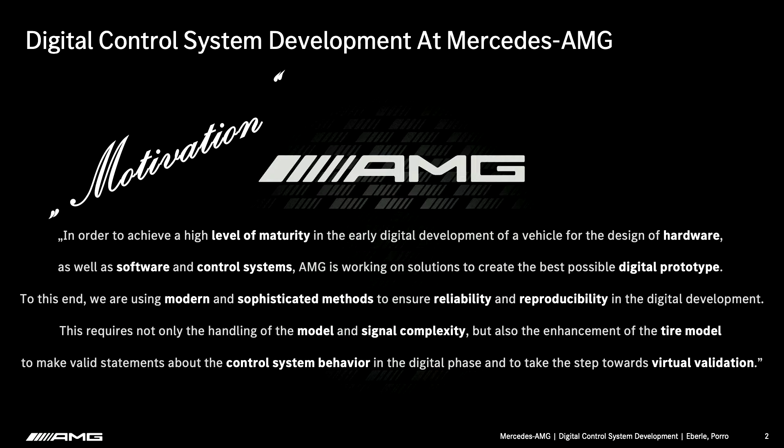This method also enables us to implement the new AMG tire model. Our goal is clear. We want to make the step into the virtual validation of control systems in vehicle dynamics. So, let's start and let's go.

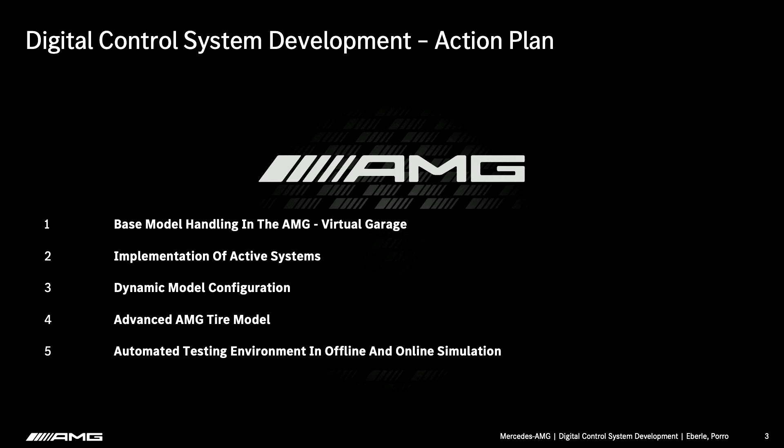So, this is our action plan for today. With the first 3 points, the AMG Virtual Garage, the implementation of the active systems, and the dynamic model configuration, I want to take you on a journey of methods and handling of our vehicle models. On the fourth point, Alessandro will talk about the advanced AMG tire model. And on the last point, I will summarize it all together in an automated testing environment, of course, for offline and online simulation. No wasting time, let's go.

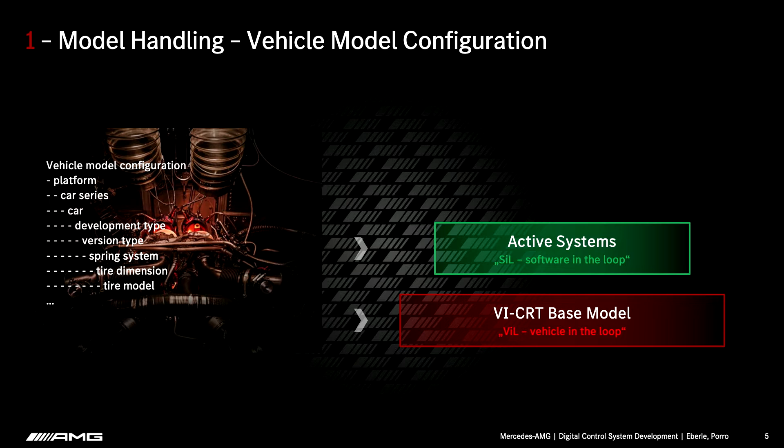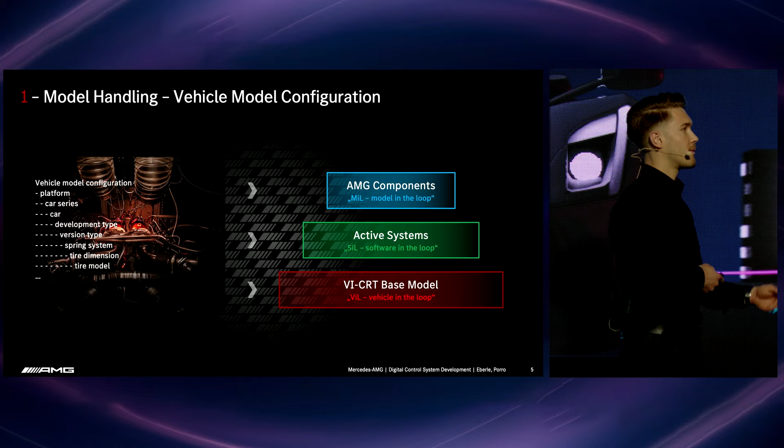Before I start with the AMG Virtual Garage, I want to explain how we define or describe our vehicle models. So we have here a vehicle model configuration, and we can split up this vehicle model configuration in mainly 3 parts. First of all, we always have a VI-CRT base model, our baseline for all of it. In the second part, we implement our active systems, and one of the most important parts, our AMG components. But now, first of all, we are dealing with the VI-CRT base model.

We have to say that this method was created due to the growth of the organization and the increasing number of models and cars we have in our organization. So once an MBS engineer exports a model from Adams to VI-CarRealTime, he or she usually has the model locally. But to increase the accessibility and exchangeability of our models, we said, okay, why not have a virtual garage where we can put all our models in. And this is called the AMG Virtual Garage.

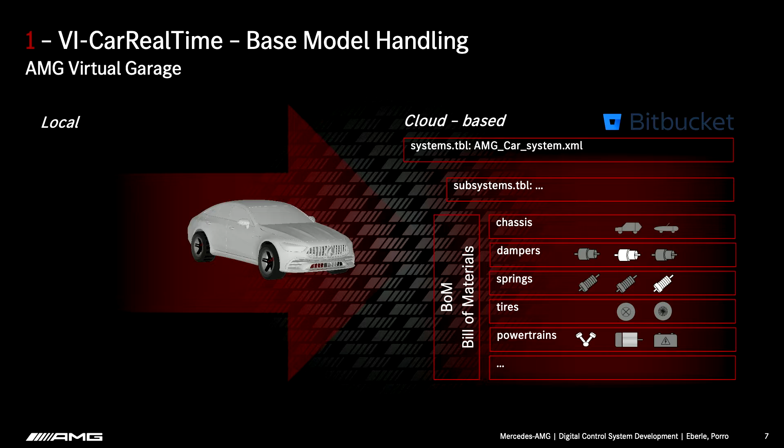So it is cloud-based here in Bitbucket, and when we take our car model, our system file, our subsystem files, and our third level files, we usually split it up into our BOM, our bill of materials. And we put these files into our goods cupboard, like you can see, for example, the tires and the chassis. And when we pull a car out of our virtual garage, we only have to take the system file, and all the subsystem files and the third level files which are linked to our system file come with us.

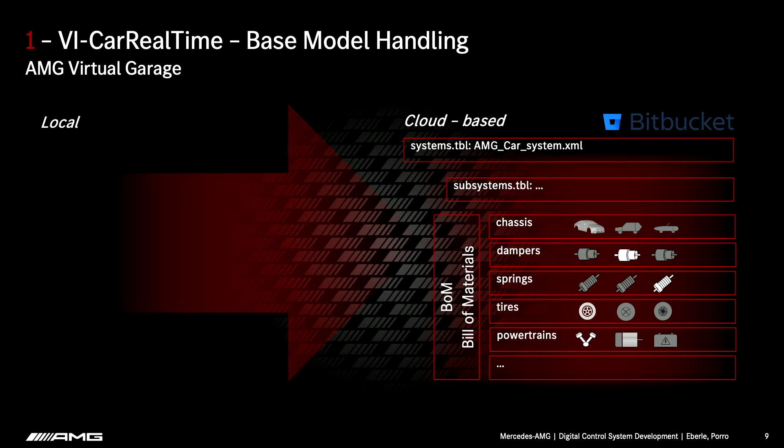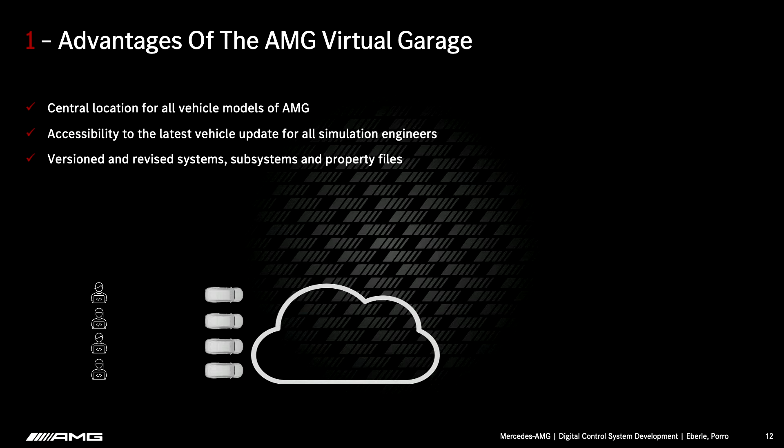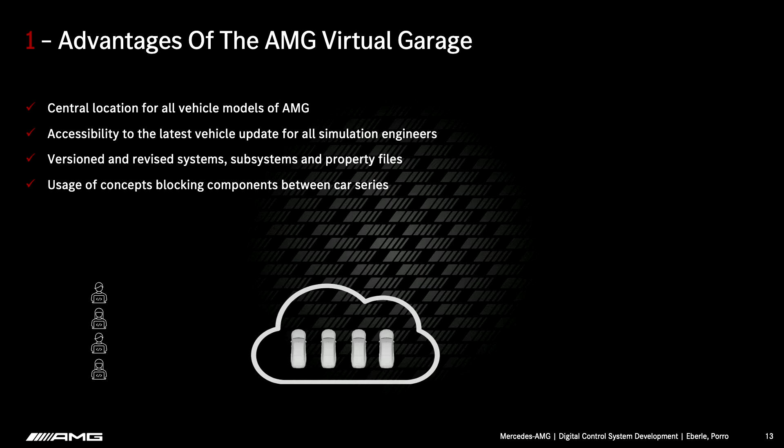So to summarize the advantages, we now have a central location for all our models. We have accessibility for all our vehicle dynamics engineers. We can document our models well, with versioned revision of systems, subsystems, and third level files. And of course, we can use the concept of blocking, because when two cars use the same spring file, for example, I only have to update the spring file once, and when I pull a car out of my garage, it always gets the latest update. And we implemented the possibility to export our models in an open or an obfuscated mode for internal or external usage.

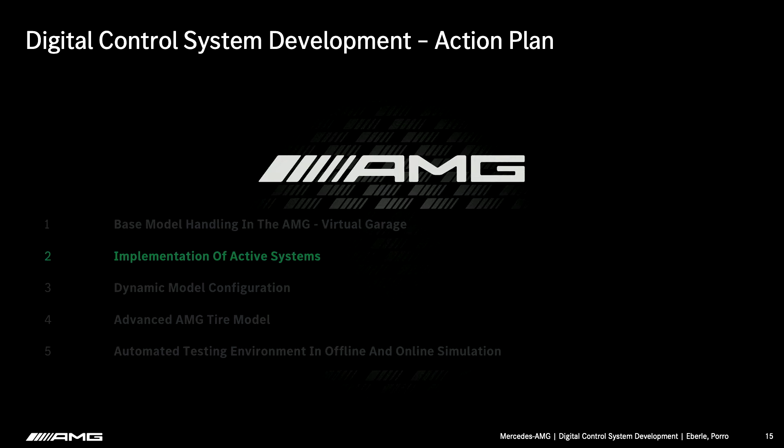So, the next step to level up our digital models is the implementation of our active systems. When I talk about active systems, I usually don't talk about the Simulink models we have. I talk about models like TargetLink models, AMESim models, C-code, or fixed datasets I want directly linked to my VI-CRT model.

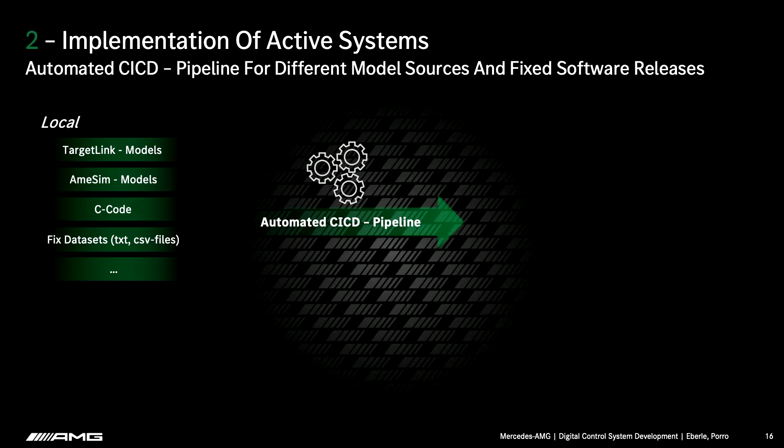When I have an update in the structure of these models or in the parameter set, I do not want to have to link the models manually. I have an automated CI/CD pipeline, and this automated CI/CD pipeline allows us to build up FMUs. And of course, they are cloud-based too, here in the Artifactory and with the node for Linux and for Windows. So I want to use my FMUs on the Windows platform and on the Linux platform, and it should be the same.

And of course, we have here a logical structure to put it into our Artifactory. To summarize, this is triggered in an automated way, so I do not have to do one click; everything is automated. I can supply fixed software releases, and I can receive fixed software releases and put them in my folder structure. I can build up platform-independent FMUs, for usage in Sim Workbench online or in VI-CarRealTime offline. And of course, I make use of the easy connection of VI-CarRealTime by the FMU master and of Sim Workbench by patching it into the real-time database.

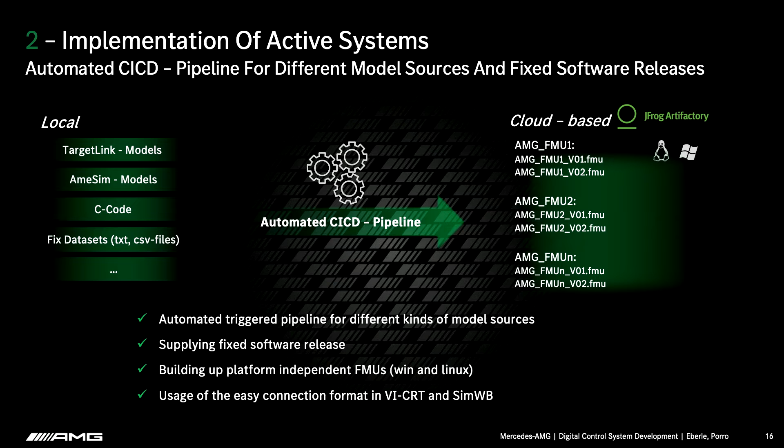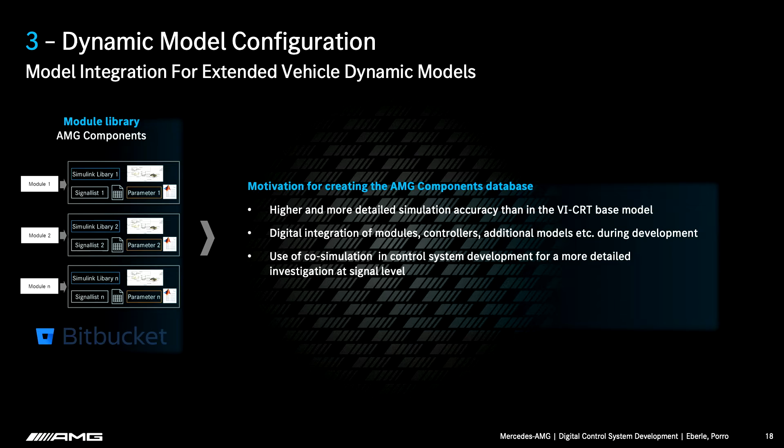Now, the third one, the dynamic model configuration. Before I go into the method, I want to explain the motivation behind it. By using the dynamic model configuration, I use the benefit of the co-simulation in MATLAB Simulink together with VI-CarRealTime, or the compiled version then in Sim Workbench. So with my AMG components, a database we build up in Bitbucket, well documented too, I can reach a higher and more detailed simulation accuracy in all of my models. I can directly integrate controllers, modules, principal controllers, and so on. This is one main part where I can implement my control systems, and I can do my developments on signal level. That's a big point here.

So these models in our database are Simulink models. Once I get a Simulink model, I add it into a Simulink library, and I build up the signal list. In the signal list, the inputs and outputs are fixed, and of course, information about signal type, signal dimension, and signal units, because later I need some calculations when I put all the modules together. And of course, at least one parameter set. And this is our dynamic model configuration.

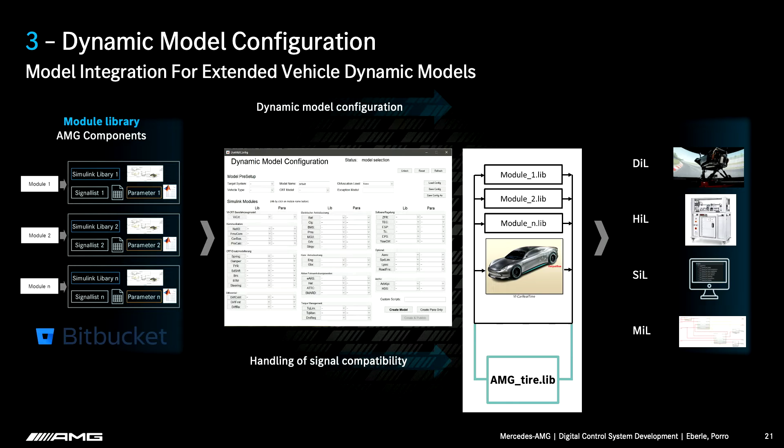I can select a target, so I can select the online or the offline version. Online is the simulator, offline my VI-CRT co-simulation. I can select the VI-CRT base model, and of course I can make use of all my libraries and the databases I have in my Bitbucket and build up a compilable Simulink model. I can use it offline and make some investigations in MIL or SIL, or I can use it in the online version and go to HIL or the driving simulator with it. And the dynamic model configuration was also the beginning of the AMG tire model. Now I will give the stage to my colleague Alessandro, and he will take you on a journey through the AMG tire model. Thank you very much, Maximilian.

So, let's talk about the tire model, how we implemented it into the dynamic model configuration, and what we did during the development. But first, we have to define a starting line. We have to define the requirements, what we need from a tire model in order to do control system development. The model should be real-time capable, so we want to use the tire model on the driving simulator. We also want to be able to start from zero velocity, so the model should be able to handle standstill conditions.

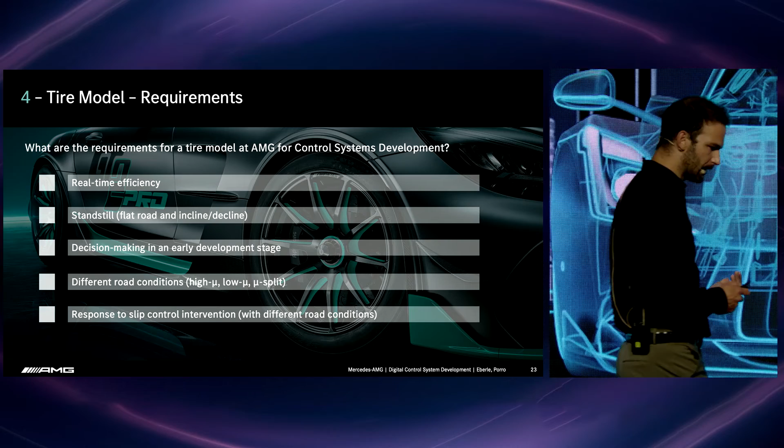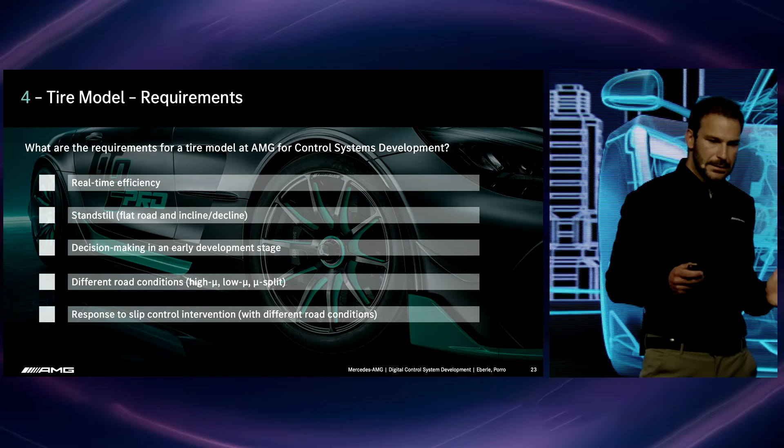We also want to be able to make decisions in an early development stage. But what does it mean? Not only that the results of the model should be trustworthy and realistic, but also that we should be able to get the parameters for such a model in an early development stage and not wait too long until we have a real prototype of the tire. Furthermore, the model should be able to handle different road conditions, so different friction coefficients, mu split, mu jump, and so on. And last, the dynamic response of such a tire model should be realistic and should have a proper response to slip control intervention.

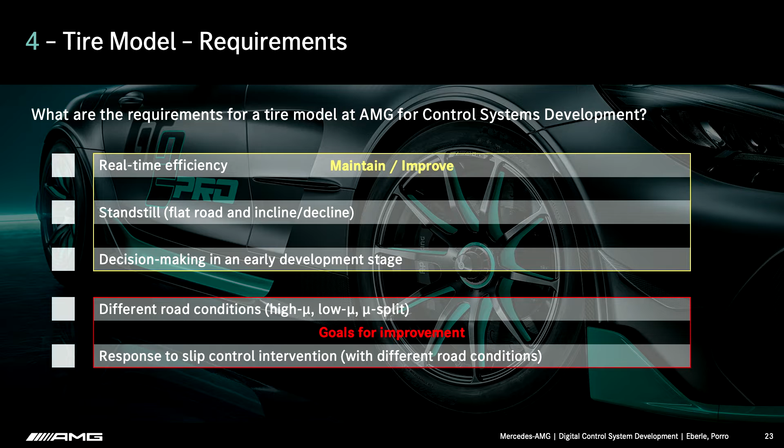So the first 3 points are our boundary conditions and also the reason why we decided to start with a magic formula-based model. The last 2 points are what I'm going to show you today and the goals for improvement. So first, we can take a quick trip to Sweden and go with different road conditions.

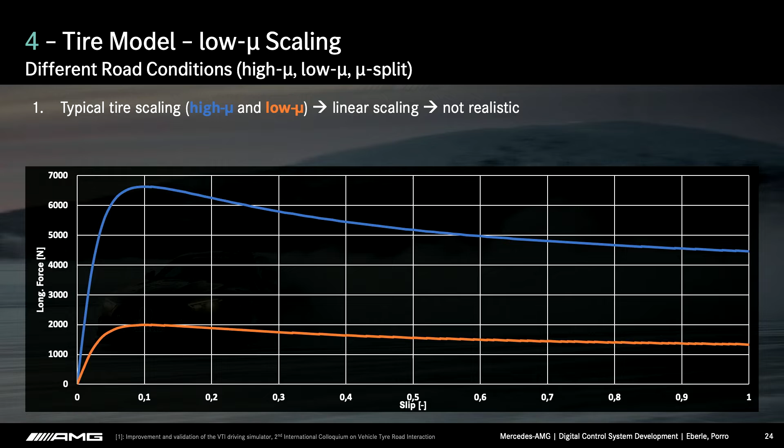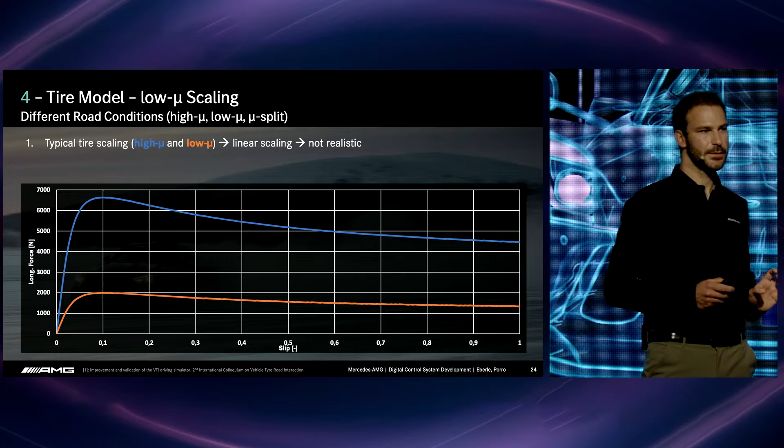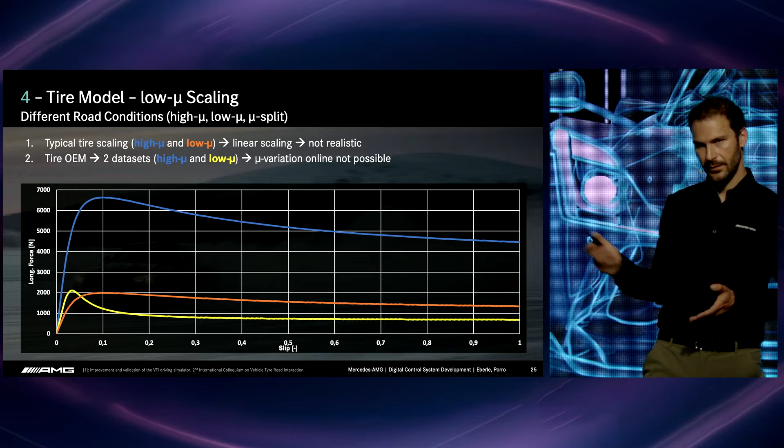Here we can see 2 different curves of a tire. The blue one is with high mu, and the orange one is low mu. This is the typical scaling of a magic formula-based model. We have a linear scaling, meaning we are just scaling down the force of the curve by multiplying with the friction coefficient. However, this is not realistic according to our literature research. We had to confirm this hypothesis, and we were able to, working with a tire manufacturer, to get a second parameter set for the low friction coefficient. This is the yellow line. We can see that the maximum force is similar; however, the shape of the curve is quite different.

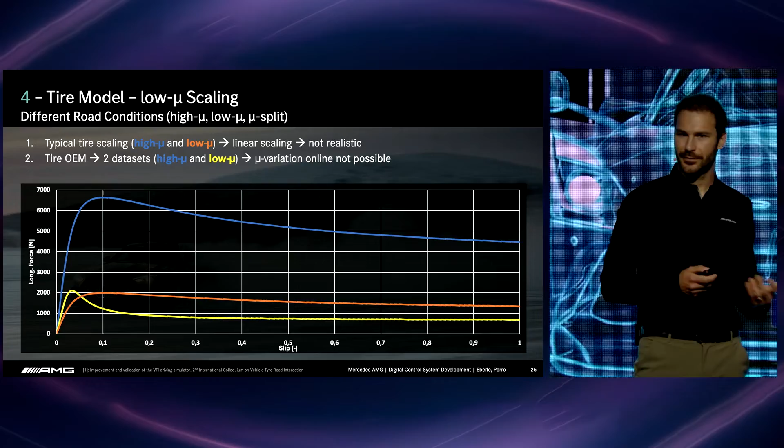But this is also not a feasible solution because for 10 different friction coefficients, we need 10 different parameter sets. And if we have a mu jump situation on the driver simulator, we have to stop the driver and say, hey, hold on, we have to load the parameter files. Okay, now you can go. This is not really real time, and we want it real time.

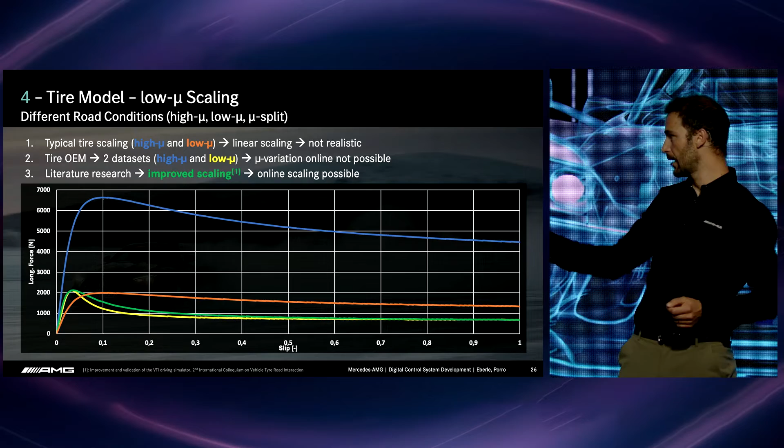So we also found a model that is able to do this scaling online. And we can see here the green line. We have a good accuracy in the 2 main ranges, which are the linear range and where we have almost 100% slip. And those 2 ranges are important when we are simulating with or without a slip control system.

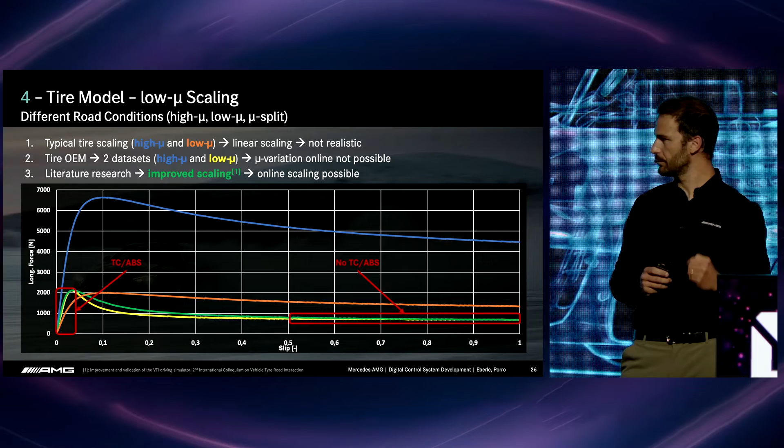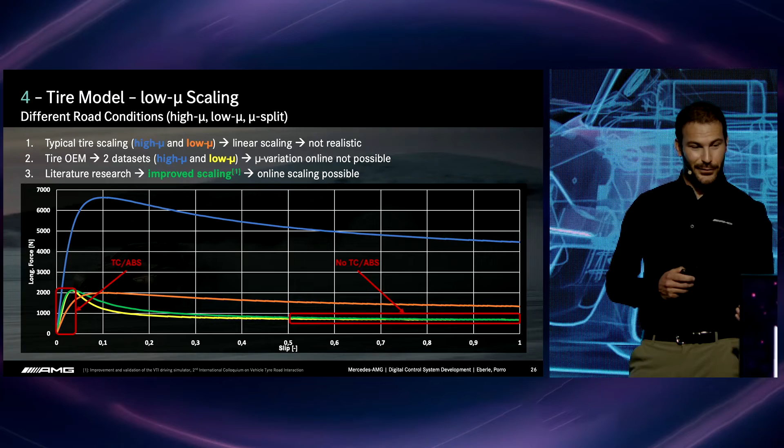Okay, good. But we also wanted to improve the dynamic response because this curve is only valid for quasi-static situations. And again, we need the starting point, and the starting point is VI tire. Why VI tire? Well, the model is a good, stable, reliable model with a lot of advantages, but we also found 2 main limitations: we are limited to only 2 different versions of the magic formula parameter set, and we can only use the linear dynamics for the transient behavior.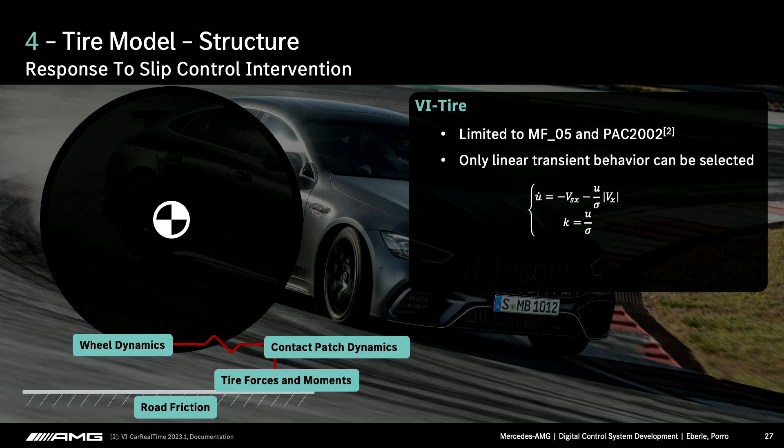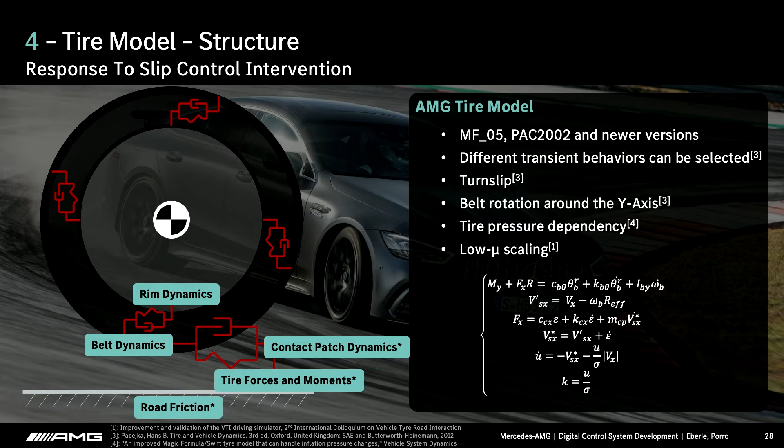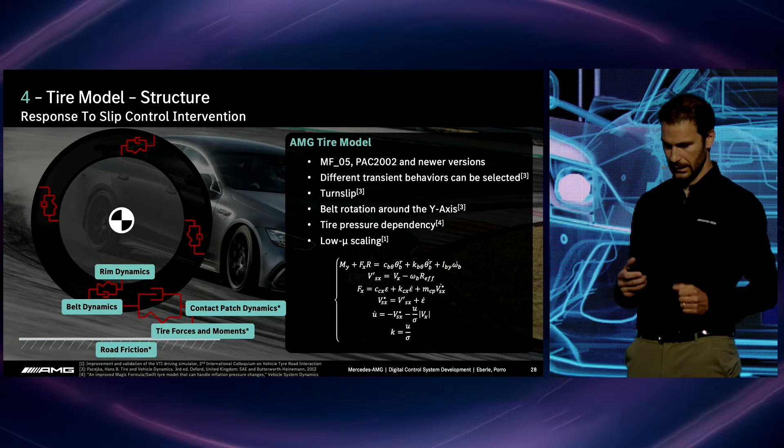So what we did, we built from there up, and we implemented the belt dynamics for the rotations around the y-axis. We also implemented different transient behavior models, so linear, nonlinear. We implemented the latest formulation of the magic formula equations, as well as, as mentioned before, the improved scaling for the road friction behavior.

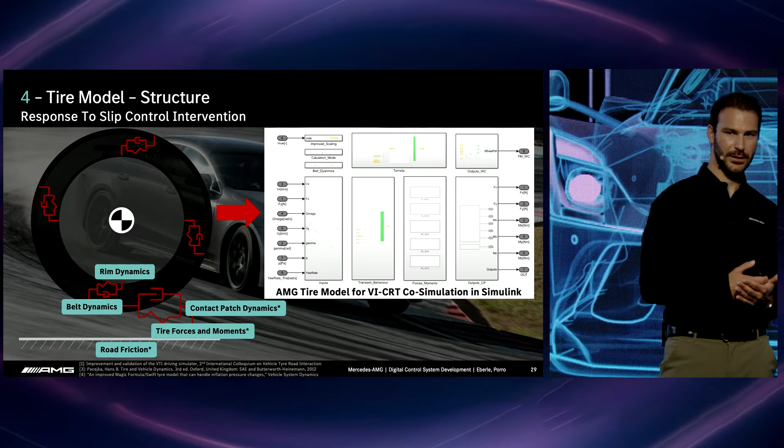So what we did then, again, dynamic model configuration, we need the Simulink models. We built the model in Simulink so that we can use it in the dynamic model configuration. We can run co-simulations with VI-CarRealTime. And now we also have to check that the model actually achieved the improvements that we wanted to achieve.

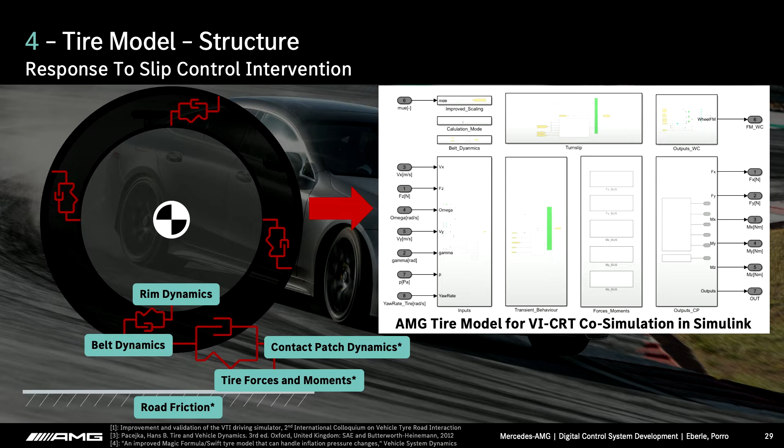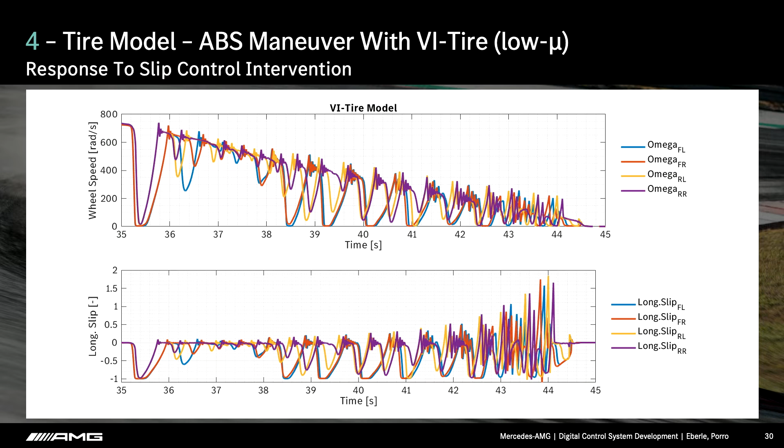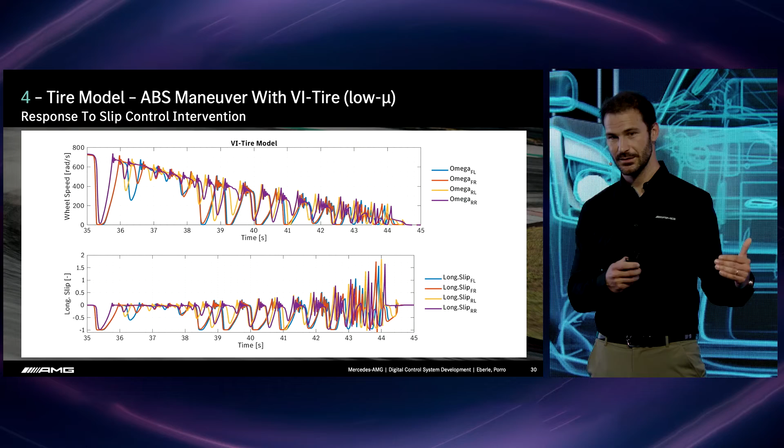So what we did is, on a HIL system, we did an ABS maneuver with VI tire. And here we see the results. We see that we have 3 major problems. A lot of vibrations when the wheel recovers from great slip conditions. We also see that we cannot recover from a slip condition at low speeds, so we are locking the wheels and not able to control the slip anymore. And we also have big peaks in the longitudinal slip in positive direction, which is not really realistic because we are braking.

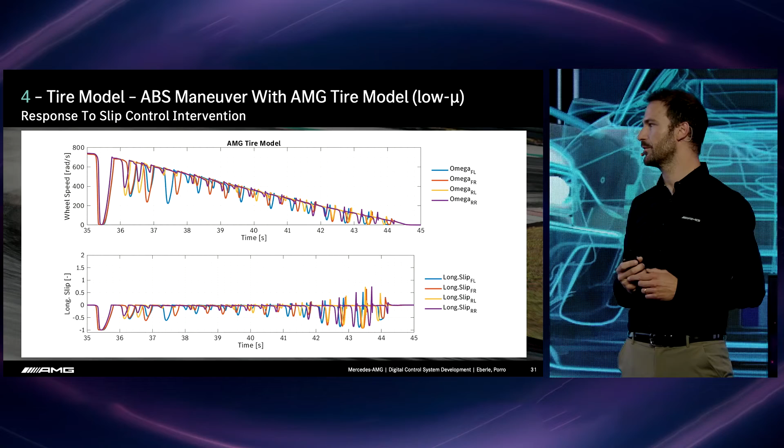So the same maneuver with the same system, same control system, with the AMG tire model. And we can see that we were able to effectively improve the model. We don't see so many vibrations when the wheel recovers from a great slip condition. We can still control the slip till 0 velocity. And we still have some peaks in positive direction, but they are way lower and only happening at low velocities.

So then we were actually able to cross the finish line and reach all the goals we wanted to achieve. And now we have a model that we can use for testing, and I'll give the stage back to my colleague, Maximilian. So please, go on. Yeah, thank you, Alessandro, for my good tire model.

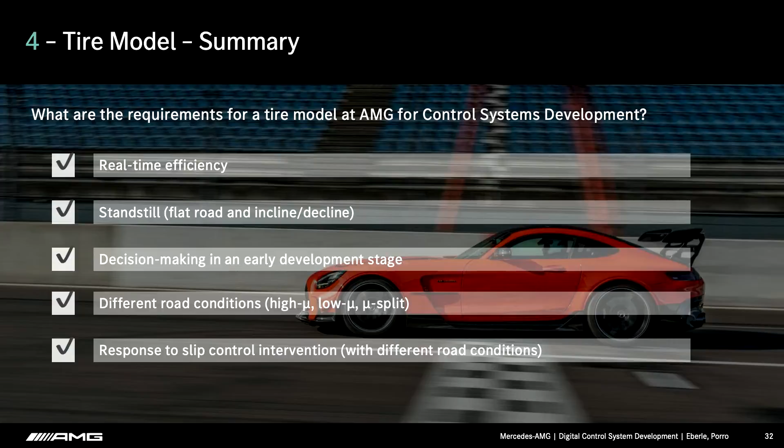So I now have an advanced vehicle model with my VI-CarRealTime base model, the active system and the AMG components, with the AMG tire model. And I have the optimal interfaces to link my control system here, in software, as an active system, or as a model in the loop. But when we want to analyze results, we have to generate results. And how do we generate results?

We have our vehicle model, and we built up a tool for defining driving maneuvers. It's called our driving maneuver catalog. And here we can define longitudinal, lateral, or the combination of both, even vertical maneuvers, and generate a great testing plan. And now I want to go with this setup into the simulation and into the automated simulation.

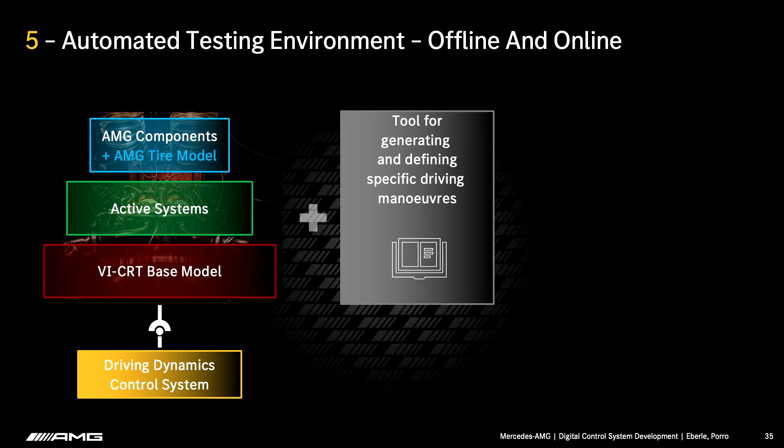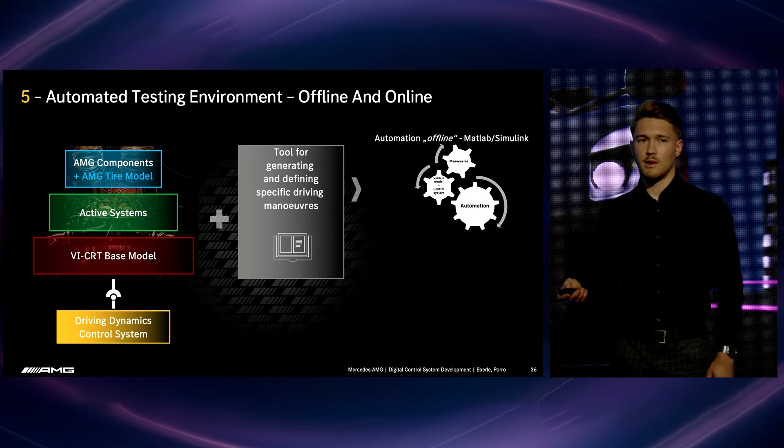And we made the offline simulation here, because when I have the vehicle model and my control system only in the software version, I have to connect it here. I take my testing plan and the driving maneuvers, and I can run the automation in MATLAB Simulink. And when we have our software available as hardware, I can also do this hardware in the loop.

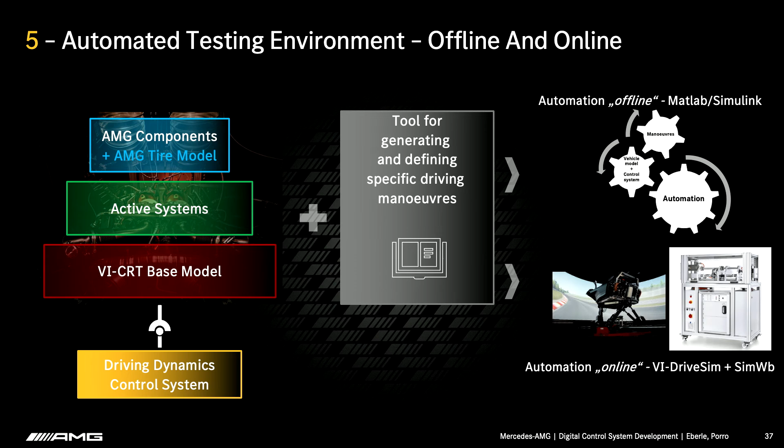So by connecting the hardware with SimWorkbench and VI DriveSim, we run the automation online. We need a little bit more effort here, because we have to change the environment from Windows to Linux, but it's also possible. So, a sneak preview here of our testing automation. So now I would say our mission here is completed.